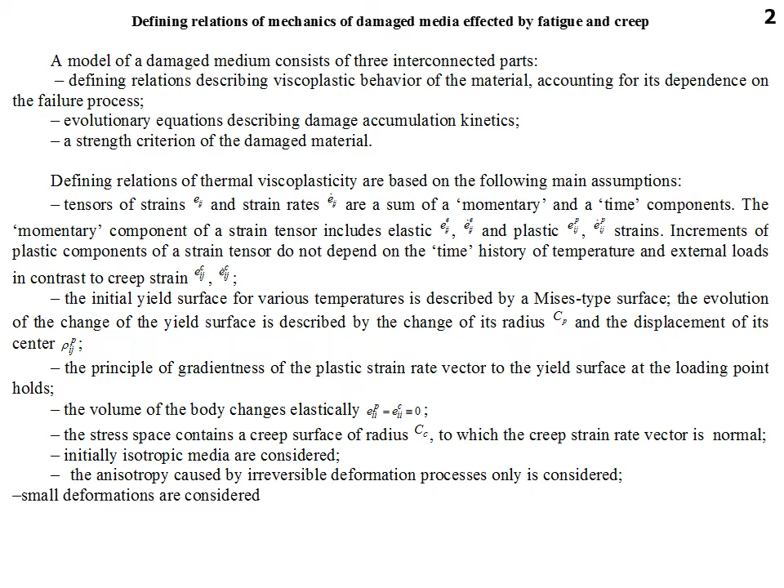In an elastic region, the relation between spherical and deviatoric components of stress and strain tensors are established using Hooke's law.

Effects of monotonous and cyclic deformation in the stress space are accounted for using a Mises form of the yield surface. To describe complex cyclic deformation modes in the stress space, a cyclic memory surface is introduced.

For the yield surface radius, the following evolutionary equation is assumed.

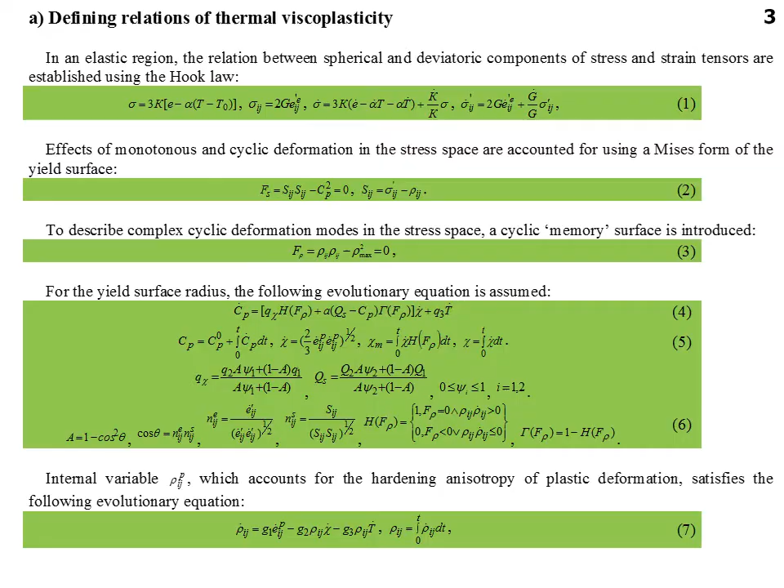To characterize the behavior of the memory surface, the following evolutionary equation is introduced.

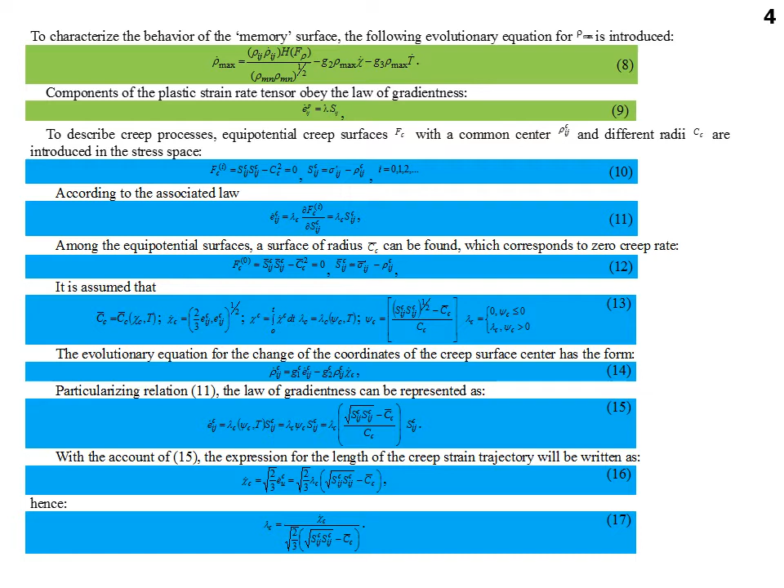Proportionality coefficient for each of the three sections of the creep curve is defined as shown.

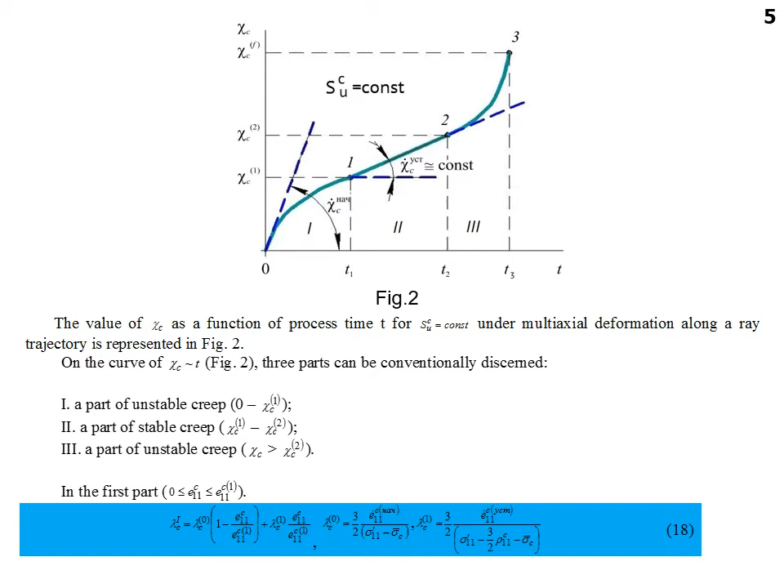The structure of the evolution equation of the fatigue damage accumulation will be presented in the following form.

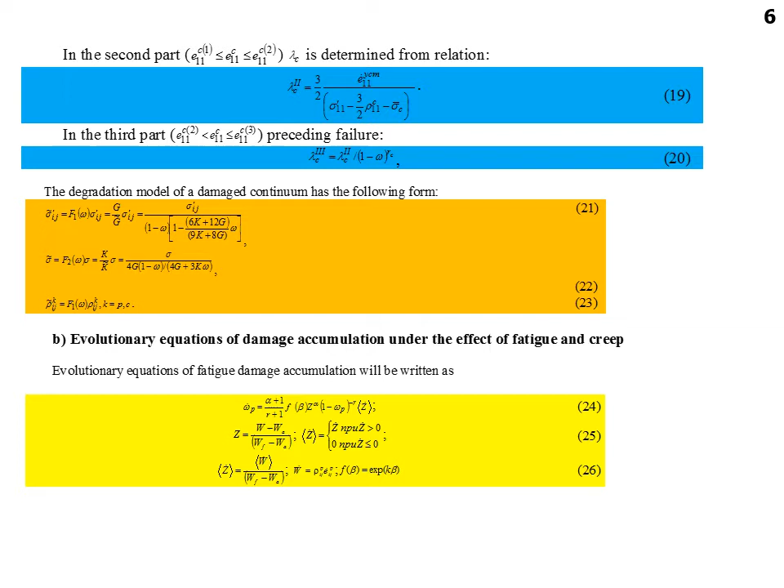The evolution equation for the creep and summation of fatigue and creep damage are expressed as shown. The condition when the damage degree reaches its critical value is taken as a criterion of macrocrack nucleation.

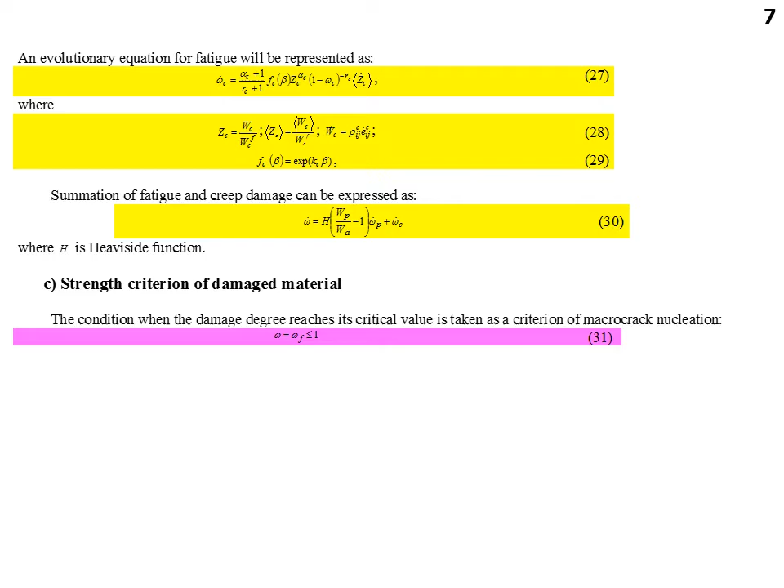This slide shows the numerical analysis of the problem of evaluating fatigue life of steel 304 under block-type cyclic loading with the increasing and decreasing cycle amplitudes.

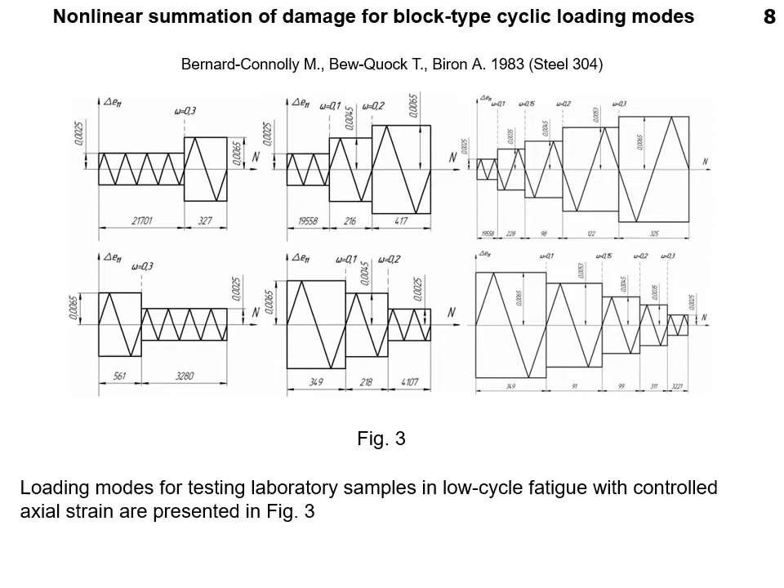Linear damage summation hypothesis results in this case in both underestimating with a margin and overestimating the value.

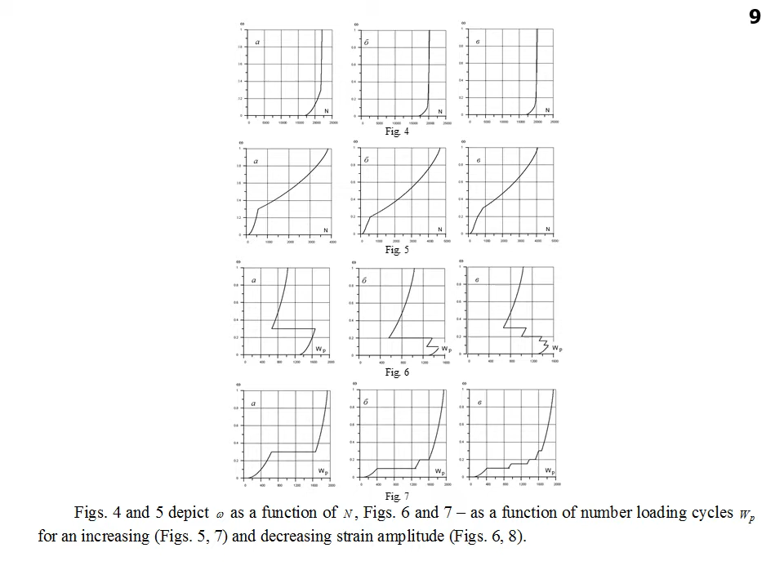In the case of increasing strain values, the damage summations exceed unity. The law of linear summation of damage yields a conservative error.

In the tests with decreasing strain values, those sums are less than unity. The law of linear summation of damage leads to a non-conservative error.

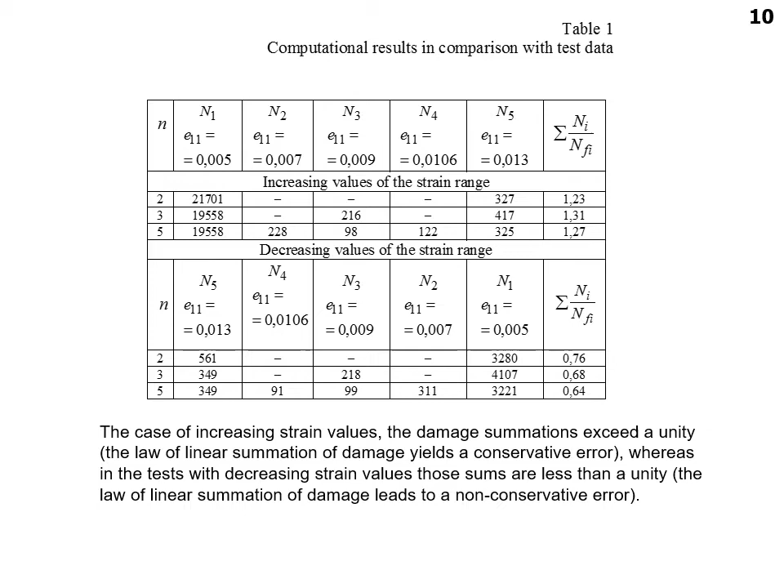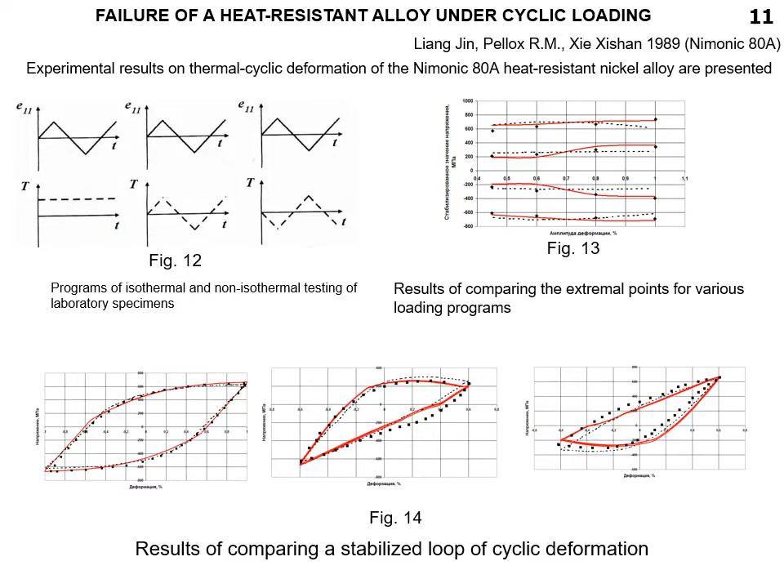The computational and experimental results show that low cycle fatigue curves for various deformation trajectories are computationally reconstructed to a high accuracy. The model of the damaged medium accurately enough describes the processes of isothermal and non-isothermal deformation and damage stress accumulation for combined thermal mechanical loading.

For non-isothermal deformation model in this temperature range, the Nimonic 80A heat-resistant alloy is insensitive to phase dependence of changes in temperature and mechanical deformation.

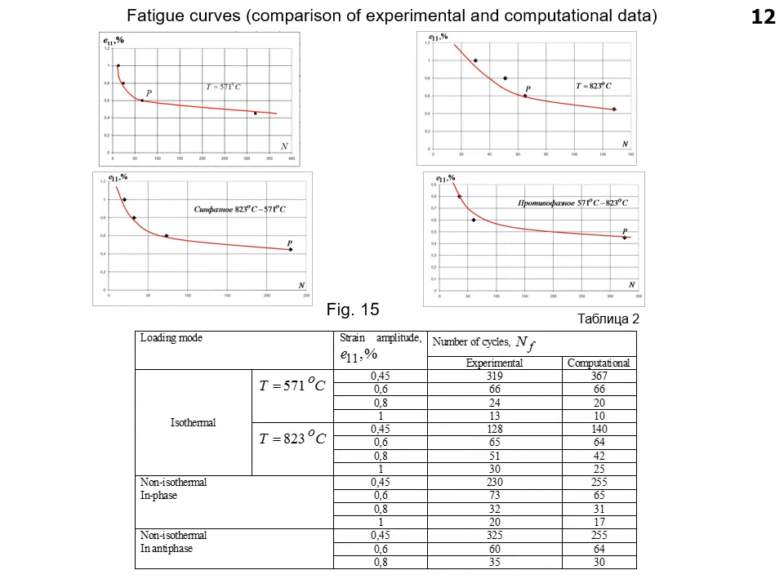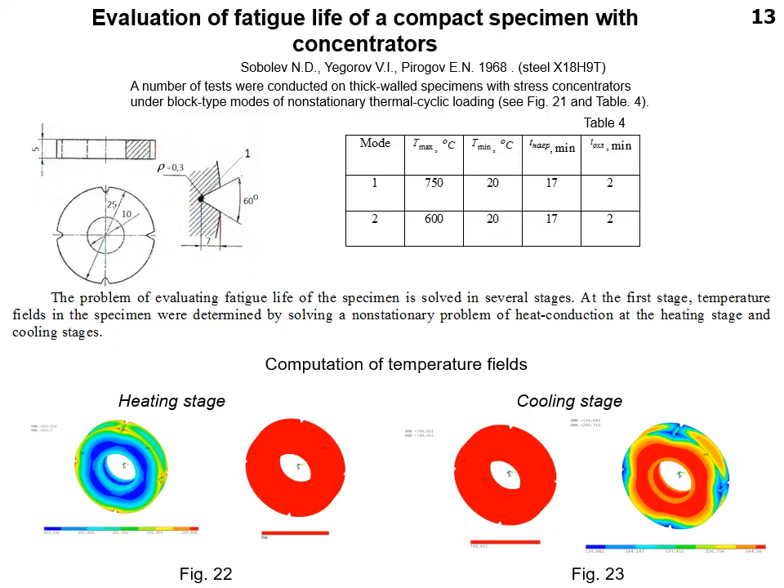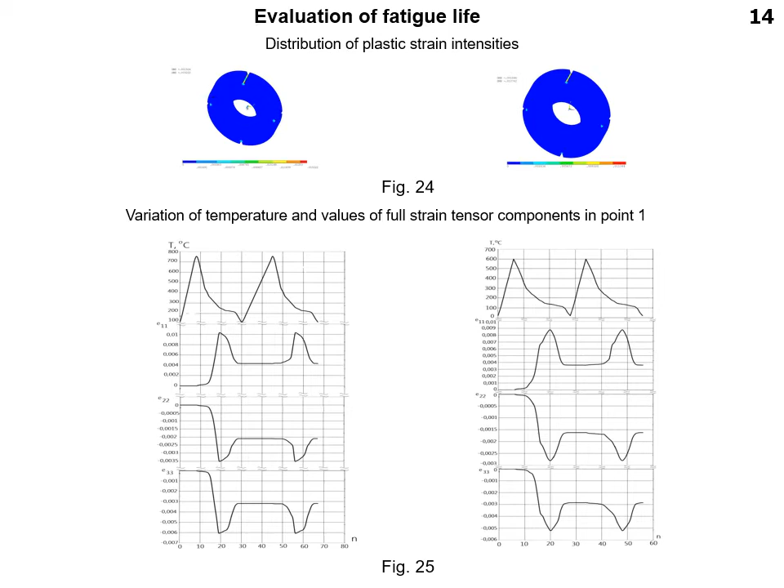It is shown that the linear damage summation hypothesis results in both underestimating and overestimating the value.

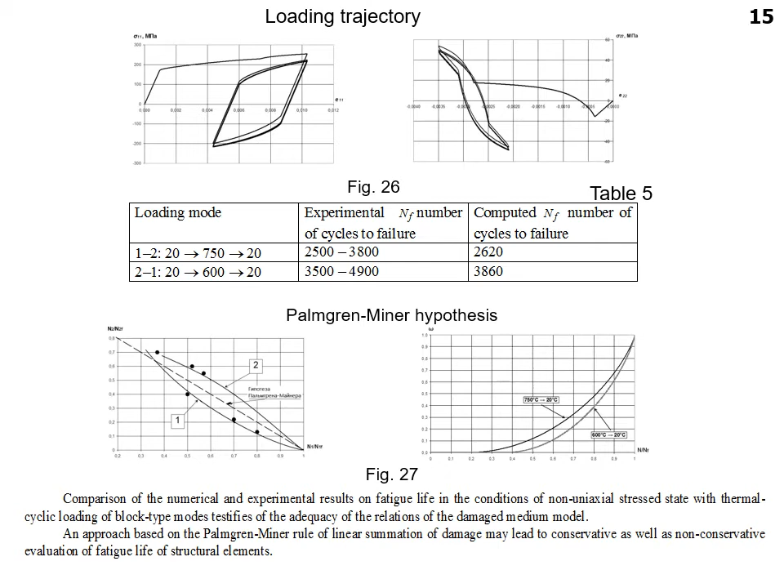Next, we present the numerical solution of the problem of evaluating thermal cyclic fatigue life of combustion chamber flame tubes with various inclinations of the coolant channels.

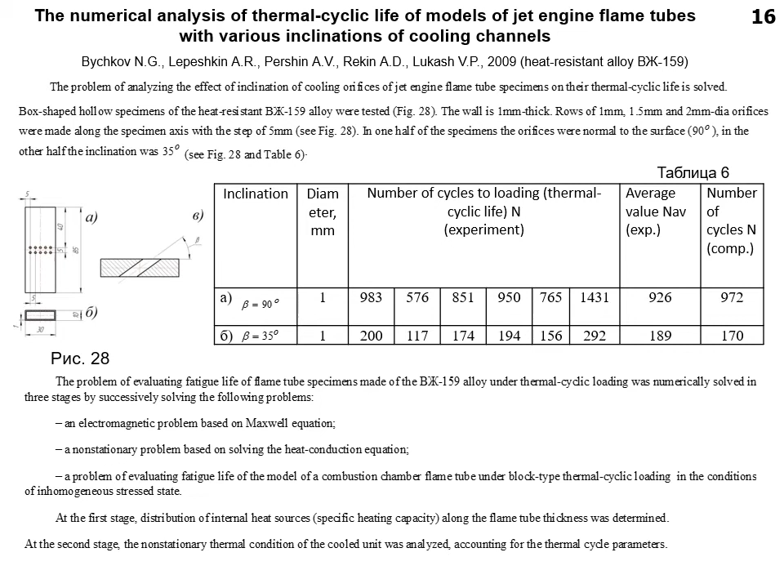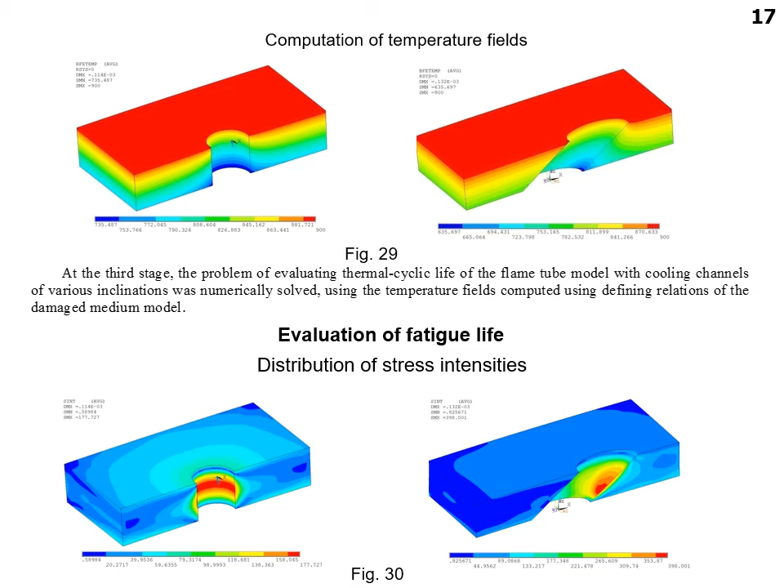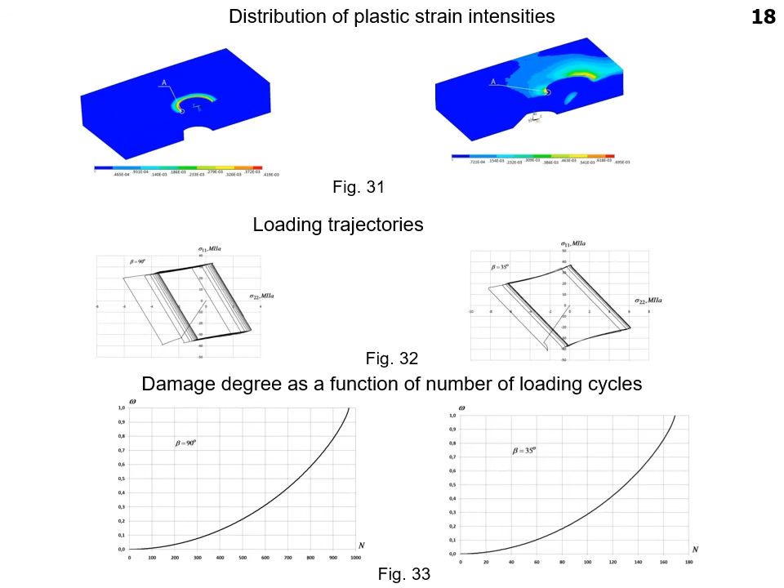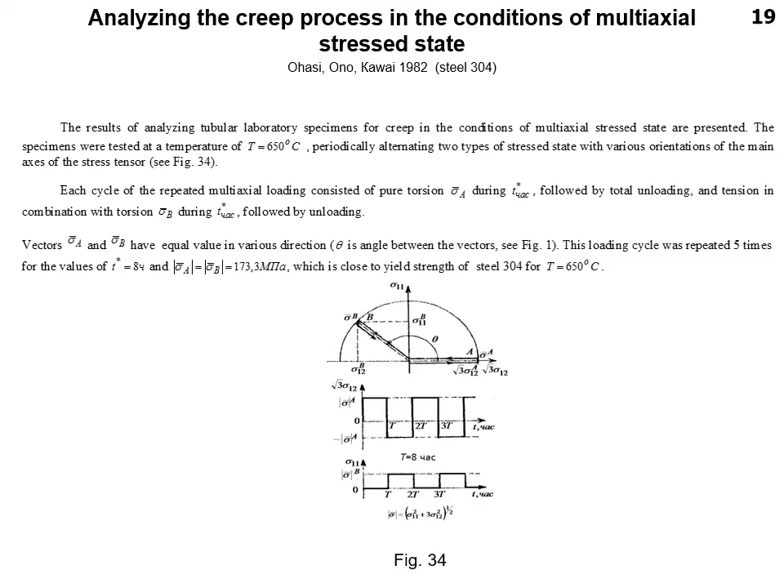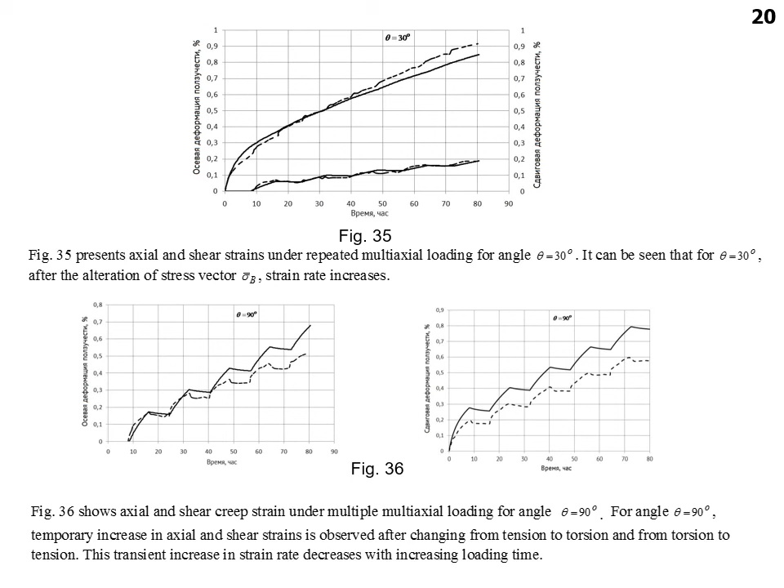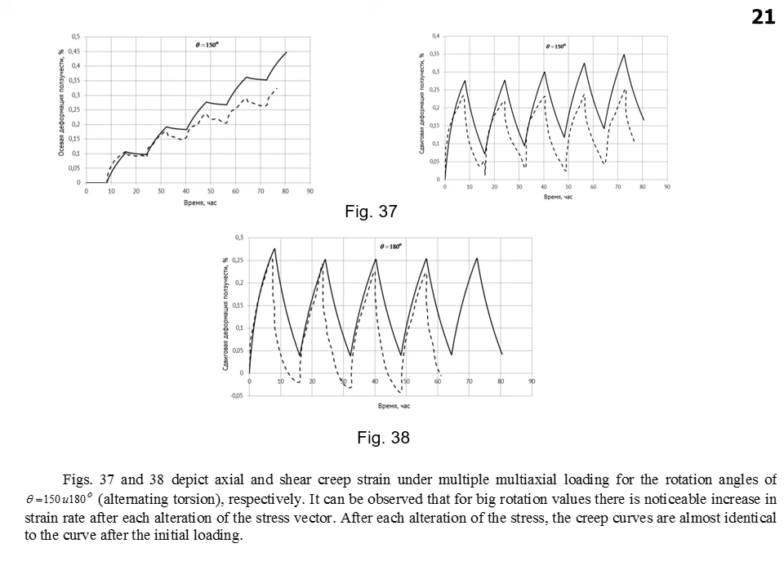Analyzing the obtained numerical results in comparison with experimental data shows qualitative and quantitative agreement.

Certain discrepancies between the computational and experimental data can be explained by the following: inaccuracy in assigning material parameters and scalar functions. The experimental information is represented without accounting for the scatter of experimental data within each individual test.

The experimental results testify to the presence of plastic strain, which was not accounted for in the computations. When processing experimental data, the incompressibility condition of the material was taken into account.